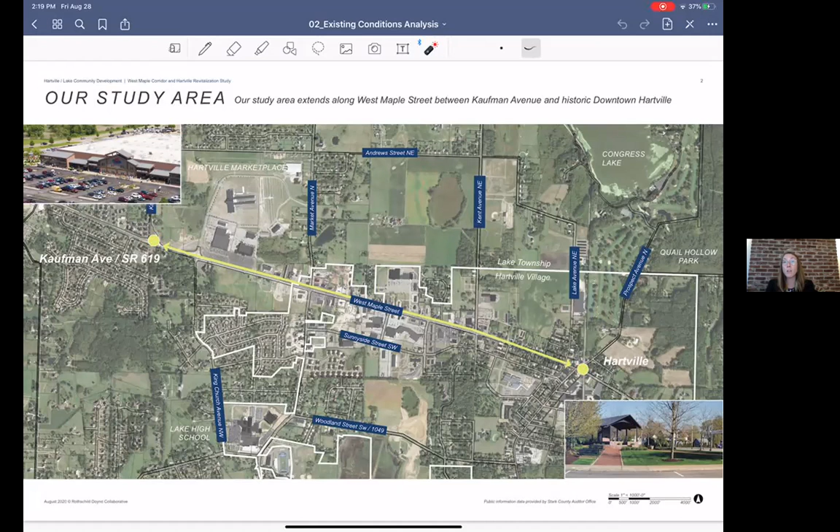HARTVILLE was established in the early 1800s. Farming, grain milling, and harvesting lumber were primary industries. With the arrival of the railroad in the late 1800s, HARTVILLE saw growth in population, and new types of industry emerged with the ability to transport goods further from town.

In more recent history, Lake Township and HARTVILLE have invested in the community. A comprehensive plan was developed, the new high school, YMCA, and library were built, and road improvements have been made along the 619 corridor to alleviate traffic. In 2019, HARTVILLE was named the best hometown, celebrating the quaint charm and historic character of the town.

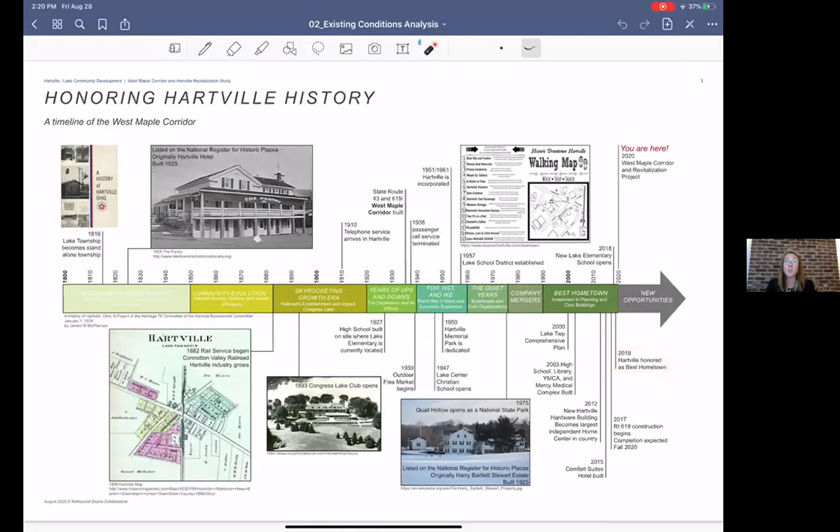The HARTVILLE area has many community assets that make it a great place to live, work, and visit. These assets include destination shopping centers like HARTVILLE Hardware, the Marketplace, and the HARTVILLE Kitchen, which draw visitors from across the region.

The corridor also has stores that serve neighborhood residents, such as grocery stores, restaurants, and gas stations. In the historic downtown area, you'll find unique stores that add character to the corridor. The area also has many community institutions that enrich residents' lives, including the schools, the library, and the YMCA. These sites are dispersed within the neighborhood on the south side of the corridor.

The HARTVILLE Lake area has a range of parks and open spaces spread throughout the community. There are sports fields near the high school and north along Kent Avenue. Memorial Park has a playground and picnic sites. Fichtner Park, tucked behind the Comfort Suites, has wooded walking trails and a fishing pond.

Quail Hollow Park is the largest park in the area, with 700 acres of land that include hiking trails, camping, and a nature center, just to name a few of the amenities.

The Quail Hollow Park Master Plan, created in 2016, identified a potential trail network that would connect the park to West Maple Street, continuing on to the elementary school, Memorial Park, and the high school to connect these amenities across the corridor.

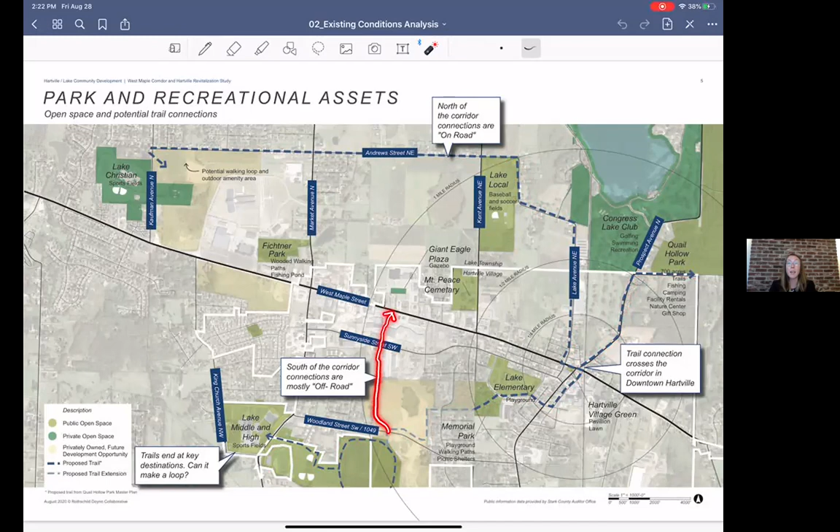To the north of the corridor, a route was identified to connect Quail Hollow to the HARTVILLE Marketplace. Since that master plan was completed, a new opportunity has emerged to extend the trail network south of West Maple Street with off-road paths through cooperation with Stark Parks and private landowners. While the proposed path network connects across West Maple Street at Prospect Street, no connection was identified to cross at the western end of the corridor near HARTVILLE Hardware.

Many residential communities, shown here on this drawing highlighted in orange, surround the corridor. The neighborhoods to the south of the corridor are within a short walking distance of West Maple Street. However, a lack of sidewalks in this area makes this connection difficult.

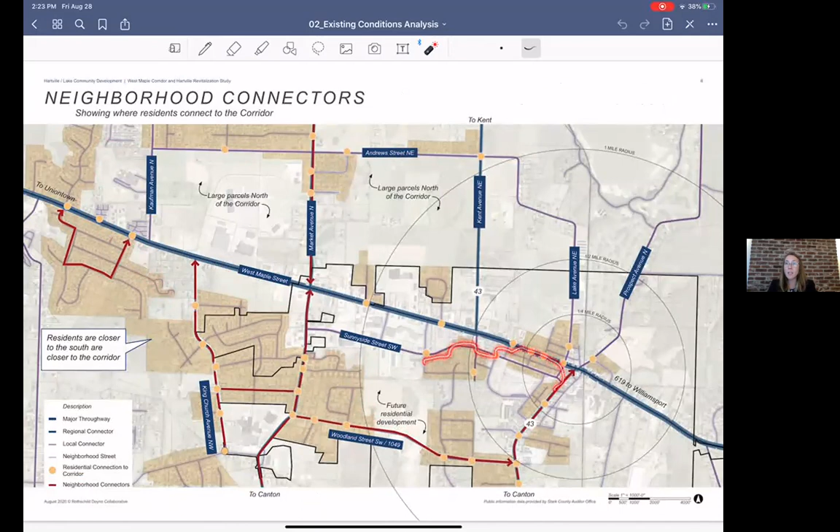Recent construction on West Maple Street widened the road between Kaufman Avenue and Market Avenue. It created turning lanes to reduce congestion around the HARTVILLE Marketplace, which sees a significant volume of visitors. While the roundabouts have eased traffic congestion, they have also increased the speed at which cars are traveling.

This stretch of road has a sidewalk on one side, but not on the other. The sidewalk here is shown by the solid orange line.

The continuous flow of cars through the roundabouts and the width of the road in this area make it difficult for pedestrians to move along and across the road.

The center of the corridor has the greatest number of crossings. With 4 signals within a 15-minute walk, or roughly 1 mile of each other, this area has sidewalks on both sides of the street, although there are a few gaps in that sidewalk network in this area.

The corridor is powered by overhead electric lines. There are 3 locations, however, where those electric lines are not overhead in the corridor, and there's an opportunity to enhance the placemaking.

This occurs in a spot along the historic downtown shopping district. Another location is at the North Gateway to 43, and the other is along a large property on the western end of the corridor.

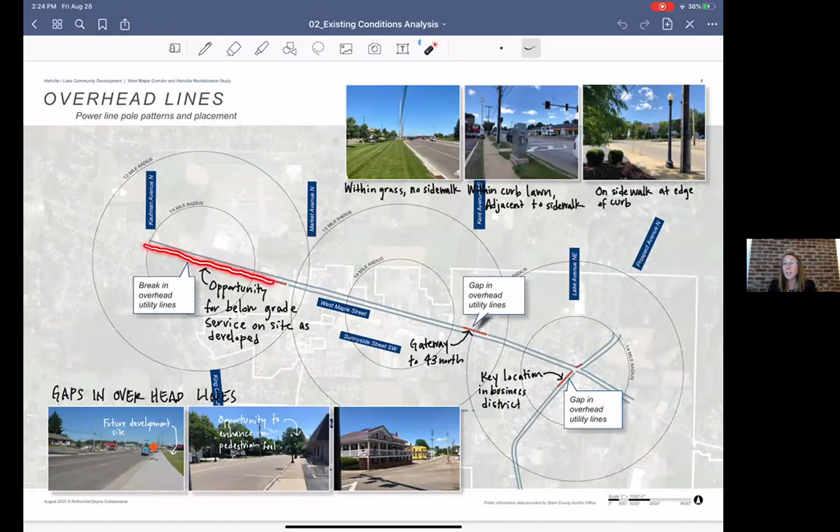Lake Township and the Village of Hartville each have their own zoning regulations and zoning districts to guide land use and development along West Maple Street.

Hartville is in the process of updating their zoning code. It includes a historic business district designation for the downtown area with the intent to preserve and enhance the existing character. Hartville also has an agricultural district that includes large parcels of land at the northeast corner of the community.

The historically industrial area along the railroad remains a space for industry. Lake Township zoning around Hartville is primarily designated as R1 or R2, which includes single-family homes.

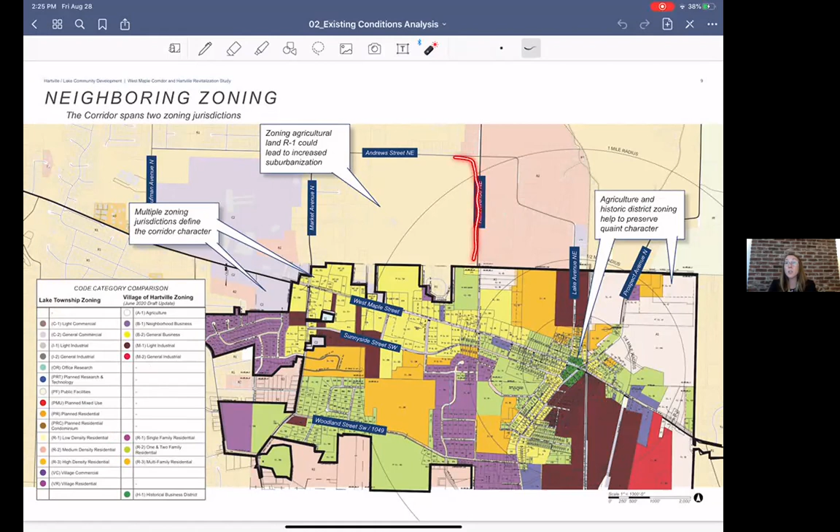Lake Township does not have an agricultural zoning designation, so some remaining farms in this area could transition to single-family home communities under this R1 zoning.

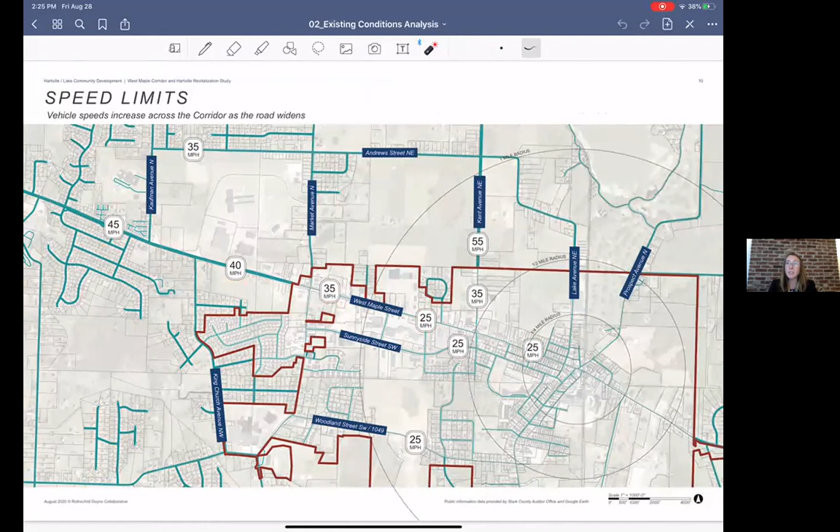The commercial developments along the corridor are accessed primarily by cars. These areas have large areas of pavement for parking.

The zoning code in Hartville determines the number of spaces each business is required to have to serve its customers. The zoning code establishes landscape buffers between properties, but has no requirements for landscaping within the large parking areas.

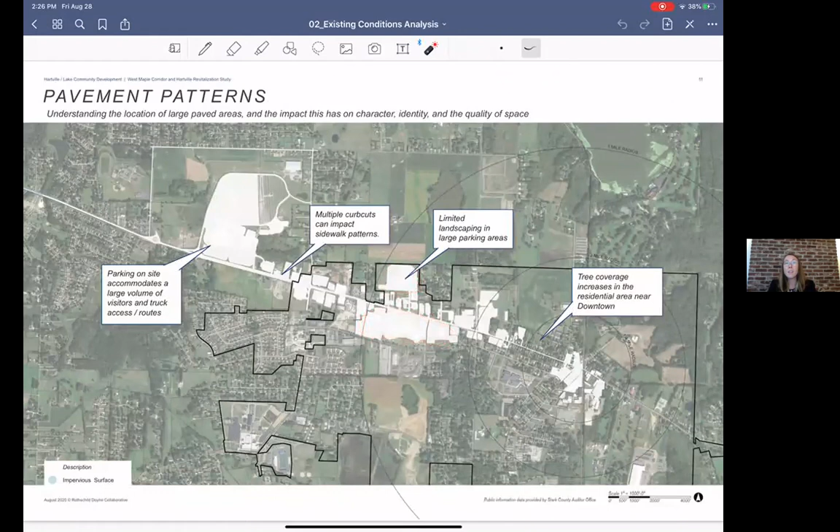As we look across the corridor, we can see areas that have similar attributes, including building scale, sidewalks, roadway width, and uses. Each of these areas creates what we call a district along the corridor. In our study, we've identified 4 districts.

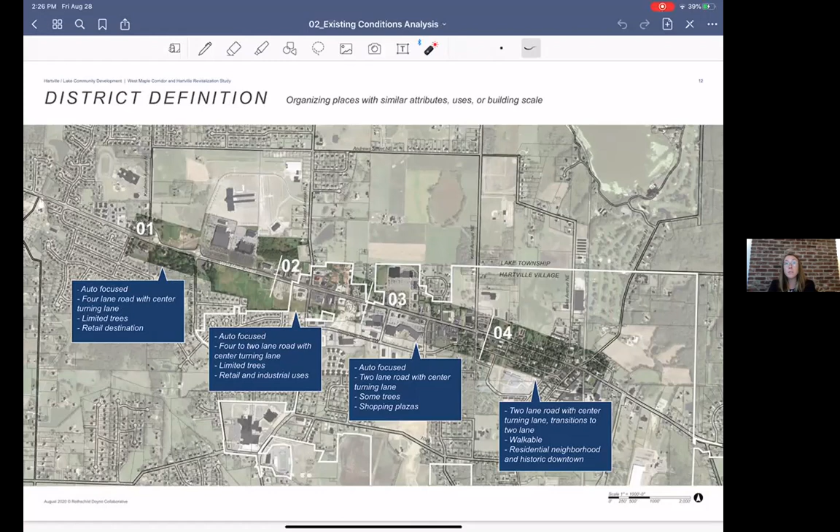The buildings are spread out and surrounded by parking to serve the large volumes of visitors. The roadway here is wider, and signage is sized to be legible and visible from a distance for drivers coming down the road. District 2 has medium-scale commercial spaces with some industrial businesses along the corridor.

The road is wide here, but there are some sidewalks for pedestrians. District 3 includes a large commercial shopping plaza on either side of the corridor, set back from West Maple Street,

with out-parcel buildings or businesses along the corridor itself. There are sidewalks here, and we start to see some trees along the road.

District 4 includes the historic residential and downtown commercial areas within Hartville. The buildings here are smaller and closer together, creating a walkable feel to the community.

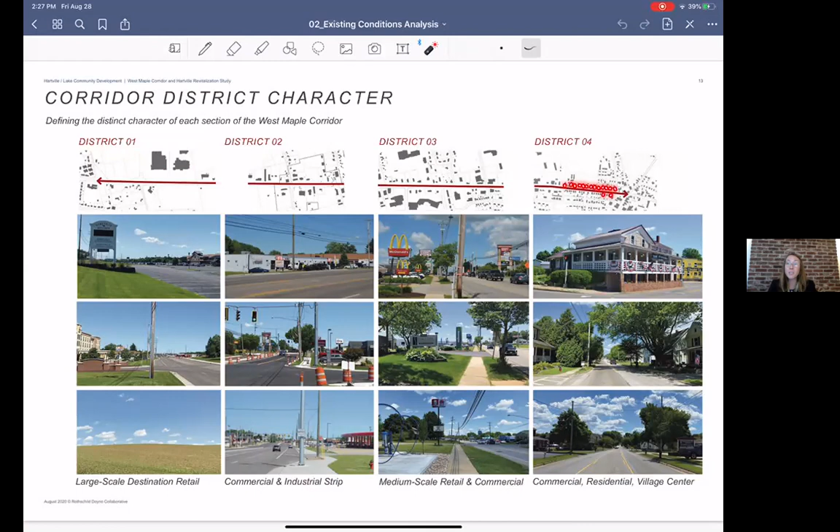This concludes our existing conditions analysis.